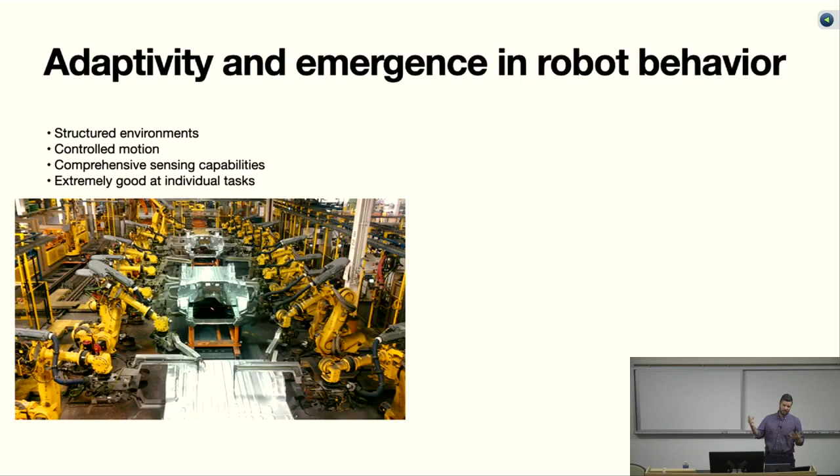I think if you ask people from the general public about what their thoughts about robotics are, we're often drawn to pictures of robots working in extremely structured environments, with very precisely controlled motion, in known settings with known perturbations, and they're extremely good at individual tasks. I actually don't have a background in robotics until my postdoc. I came up through thinking about living systems and working with collectives like ants and other organisms that have to deal with challenging locomotion tasks, move in complicated worlds, have very limited communication capabilities. This background really structures what I look for in working with robotics. I'm interested in things that can work in unstructured environments and display adaptive and robust capabilities.

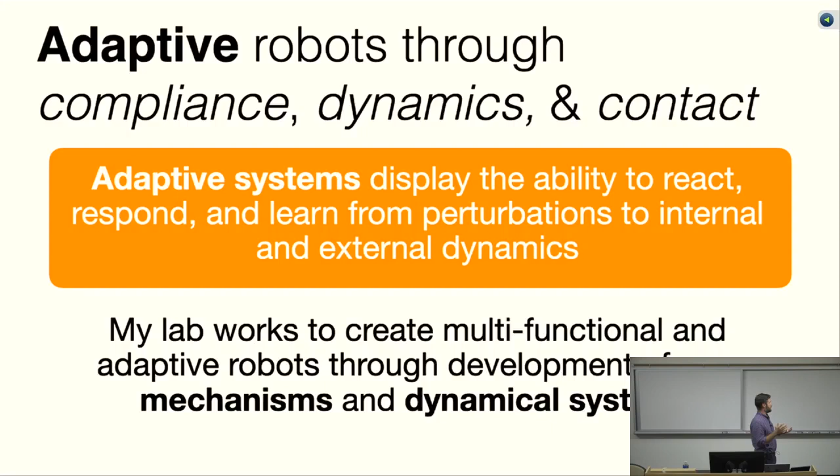In my talk today, I want to talk about three different aspects from the research topics in my lab, all focused around adaptivity. Adaptivity being the ability to learn, react, respond to perturbations, both internally and externally. We're going to talk about these in three different contexts: structural contexts like compliance, dynamic contexts like feedback loops that have emergent dynamics, and collectives that interact through contact. These are just a subset of the things that we work on in my lab.

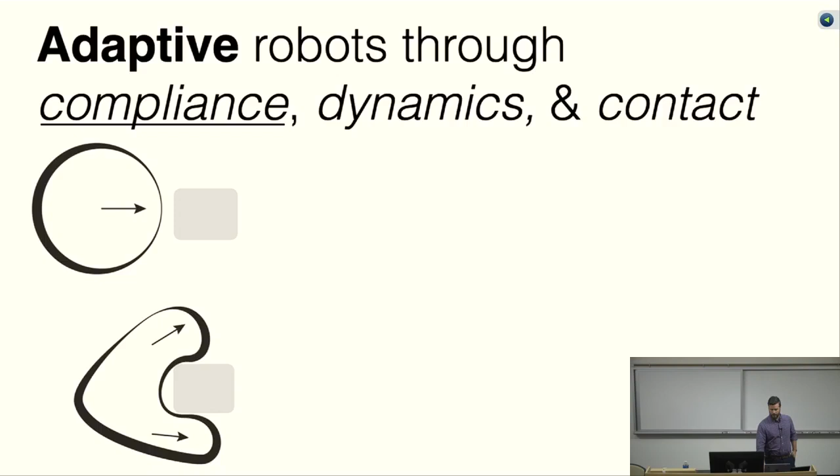Namely, like I just said, compliance is one of the themes of the things that we work on in my lab. Compliance has the inherent ability to adapt. Soft structures can change their shape in response to contact with objects in the world that maybe are unanticipated. We can use compliance to make robots adaptive with less control. There's a very emerging and interesting area of soft robotics that is exploiting compliance.

Similarly, I'm interested in dynamic systems from a dynamical systems perspective. These systems have adaptive capabilities all through underlying dynamics that don't necessarily come from programming in those behaviors, but come from the emergence of those behaviors from the connection of interconnecting sensory motor systems.

And I'm fundamentally really interested in systems that interact through contact. Collective behaviors where the robots or the animals are all in really close proximity, and the interactions are really mediated by mechanical interactions like bumping into each other, exploring how we can design systems that take advantage of those kinds of interactions.

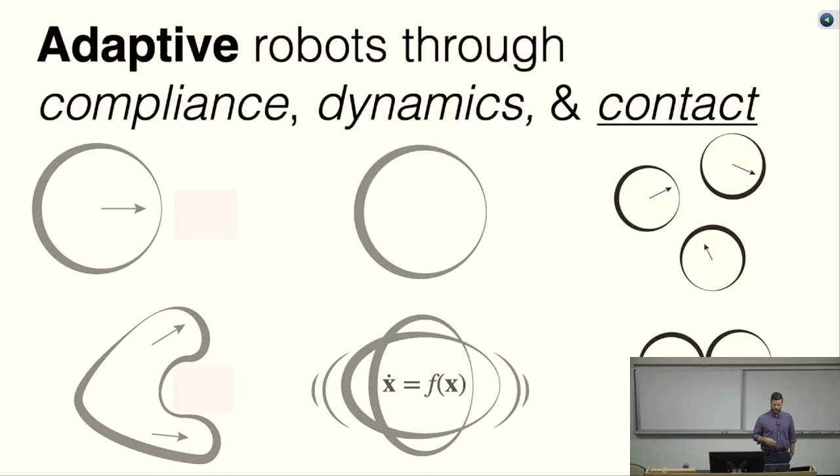The first topic that I want to talk about is using compliance in structures to make robots that can change their shape, that can modulate their behavior, and that can do this in adaptive ways. The first way that we thought about doing this was by using and exploiting material curvature to change the compliance of the body of a robot.

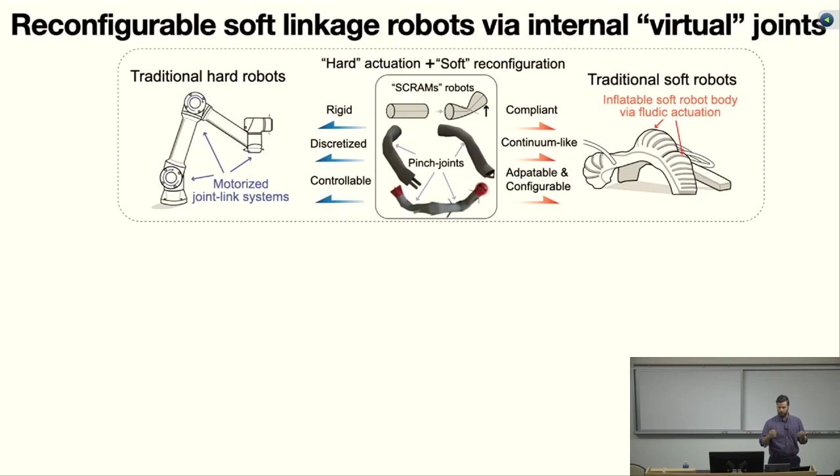By changing curvature, then we can change the local compliance that exists in a robot. You all probably have experience with how curvature controls compliance. A paper roll tube has high strength, but if I put a bend in it and make the cross-section flat, I now have something with very low bending resistance, and I can make a functional joint in a robot. We envision that by using tubular structures and changing their local curvature, we can make robots that can reconfigure the kinematics of their body, as well as reconfigure the compliant properties of their body for different types of tasks.

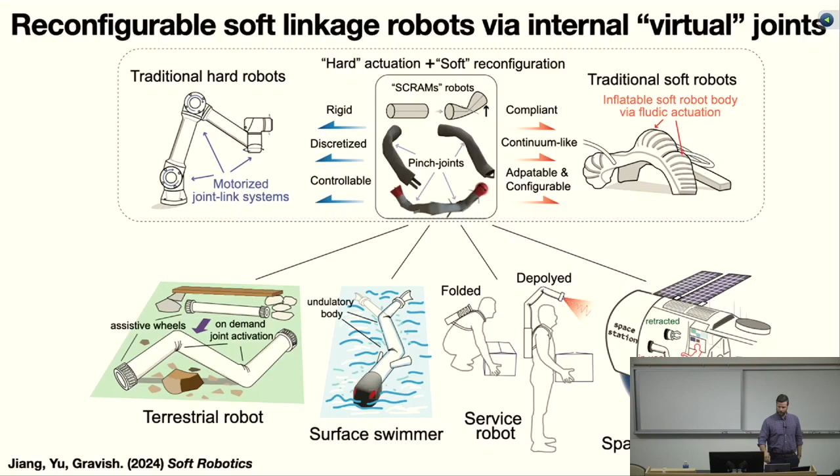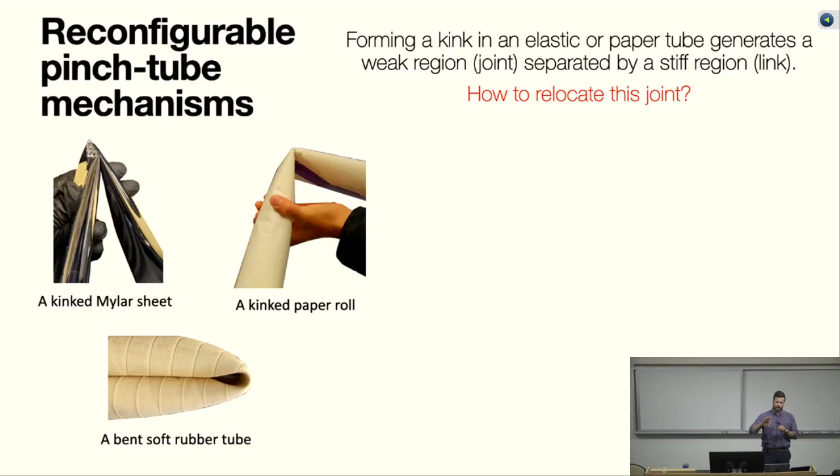So truly, the example of this is just pinching tubes. We worked on these reconfigurable pinch tube mechanisms, first exploring different ways a tube can create a functional joint, or create a structural element where the circular cross-section gives that part of the tube structure. The question we asked was, how can we reconfigure the bends that exist in these tubes so that we can reconfigure the types of joints we can create?

My student came up with a method where, if you take a flexible tube and pull a vacuum in it, it's going to buckle. But the problem is that buckle will happen anywhere there's low resistance to bending in the tube. So to control the location of that buckle, we put a cuff on the tube, slightly oval in shape, and by rearranging the arrangement of that oval, you can control exactly where you create these pinch points, controlling the location and orientation of a flexible joint.

Flexible joints are like the underlying structure to serial linkages and robotic linkages. By being able to change and reconfigure the locations of these joints, we could explore how to make different combinations of these pinch joints into different arrangements of serial linkages that could be completely reconfigured. The material they're formed from is soft inherently.

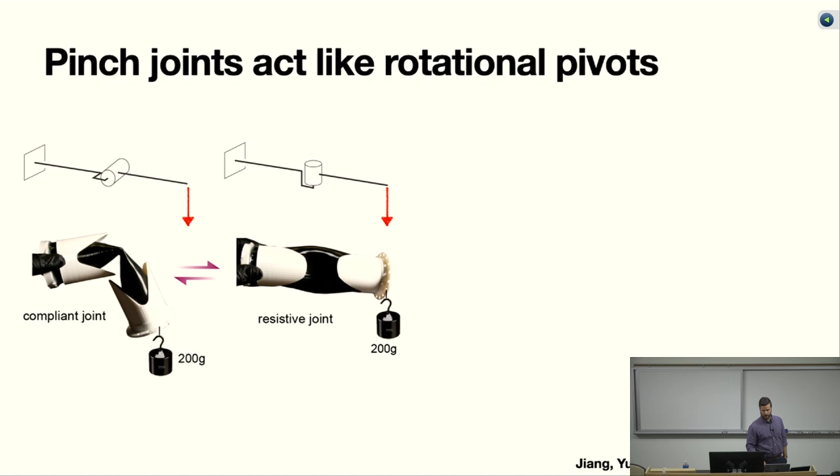It's a soft 3D printed TPU, to be exact. By pulling the vacuum, we create a very soft location, and by keeping a circular cross-section in other areas, we maintain structure. We used this to make what we thought were really interesting, simple reconfigurations of serial linkages for robot tails, used for little flapping and swimming robots.

We wanted to expand on this because right now, in this implementation, these joints are unactuated—they're being pushed on by a student. This is showing two different configurations: one where the two joints are configured on the same axis, and one where they're orthogonal.

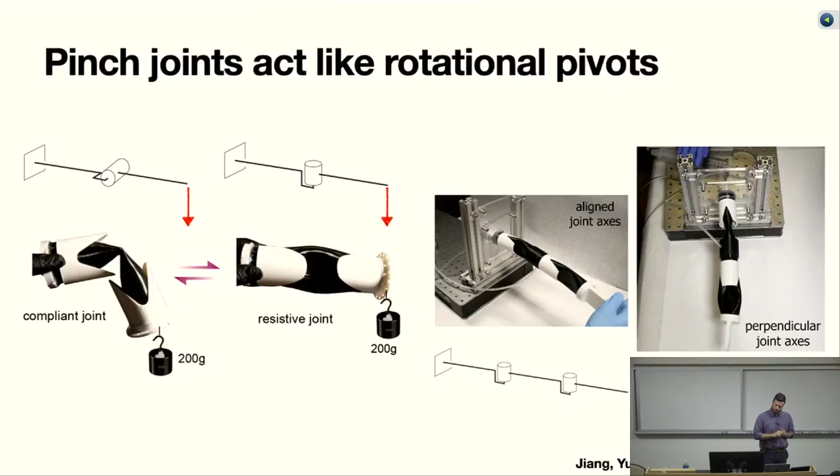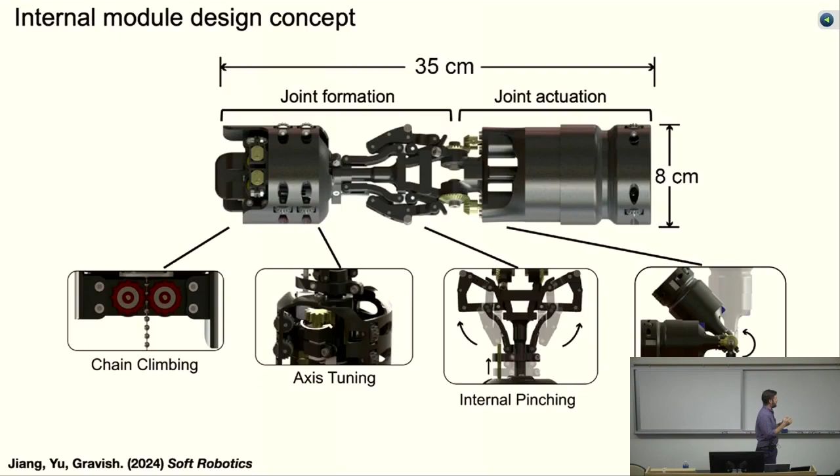But to actuate these systems required a whole re-envisioning of this problem. We designed internal modules that could move within an inflated tube—now not pulling a vacuum but inflating—and these modules were able to relocate within the tube, change the axis on which they'd form a joint, and then actuate that joint at that location.

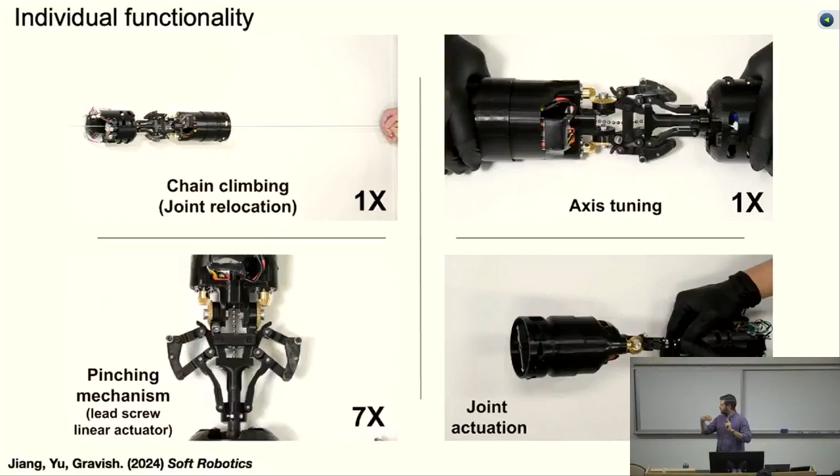So the idea is that I have an inflatable tube with modules inside that can move to any desired location. They can create a joint axis at any angle, and then actuate up to plus or minus 90 degrees at that location.

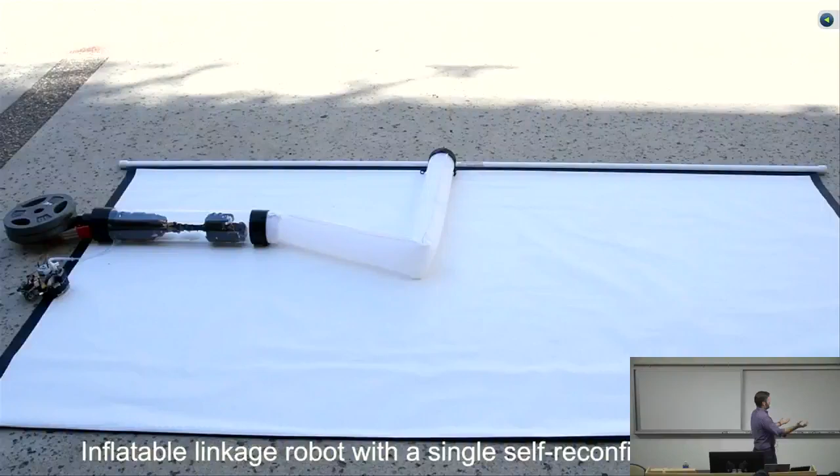The idea is that this all exploits the structural properties that tubes give us—that inflated or structural tubes, like the TPU one I showed before, have high cross-sectional area, high stiffness, and provide structure to a body. Whereas when I pinch that tube and put a bend in it, I create local regions that are relatively weak, which we can bend and use for actuation and reconfiguration of joints.

There's a ton of demos associated with this that I don't have time to show, but we made little walking robots that walk by rolling their limbs and paddling themselves across the ground. These are all untethered—they each have their own Wi-Fi module, their own battery, their own communication systems, and they can move, relocate, and reconfigure for specific locomotion tasks.

So that's just one example of using curvature, where we can change the local curvature of a structure to change the properties of the joint associated with it. This is all work that emerged from the EFRI project—somewhat older work, but it finally saw the light of day.

Another area where curvature, materials, and mechanics interact that I'm really excited about is the following. I'm sure everybody's used a tape measure before—if you haven't, you should, they're pretty fun. Tape measures have a really interesting structural property. If you've ever played with one, they are soft when you bend them, and they can create reconfigurable locations of a bent joint.

They're pretty strong, and if you push against the direction of curvature, you actually make a pretty strong beam. Tape measures can be rolled up into a very small, compact shape. I can put 25 feet of a spool of tape measure in a very small area.

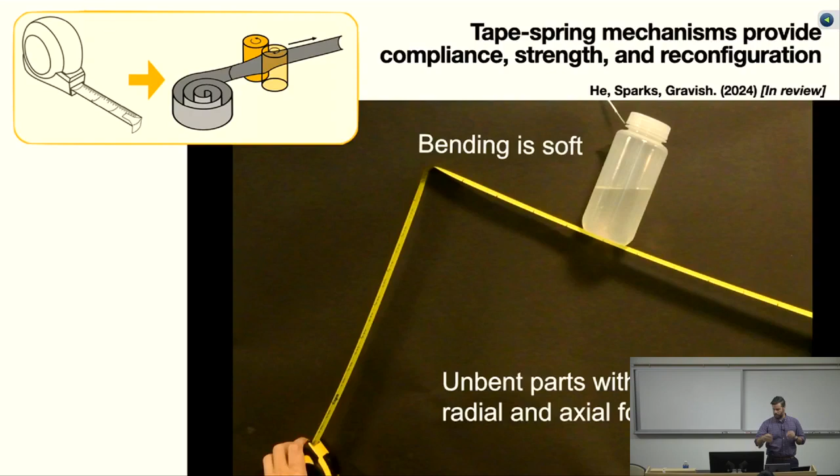So we wanted to see how we could also use curvature in the context of tape measures, where the curvature is what's providing the strength to the overall structure, to make manipulators.

And since I have 25 feet of spooled tape within there, I can do really interesting manipulation kinematics, all from the fact that the curvature of the cross-section when it's in its ovalized shape is quite strong. But at the flattened shape where we form this buckle bend, it's extremely low resistance. I can basically freely reconfigure that location.

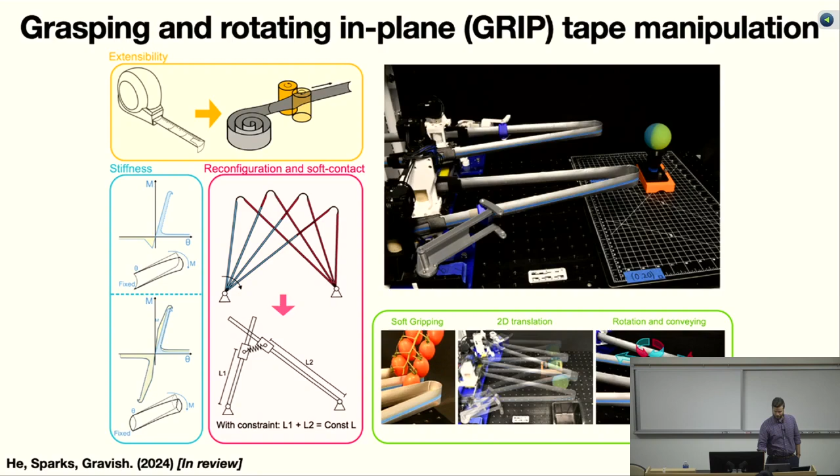This is a first version of this, and you'll see it's truly a tape measure. What's really cool is that we can do these interesting kinematic manipulations where, for instance, by unspooling tape on one side and spooling tape in on the other side, we can keep an object in place and rotate it. And again, we can do this over large rotations because we've got a ton of tape that is spooled up.

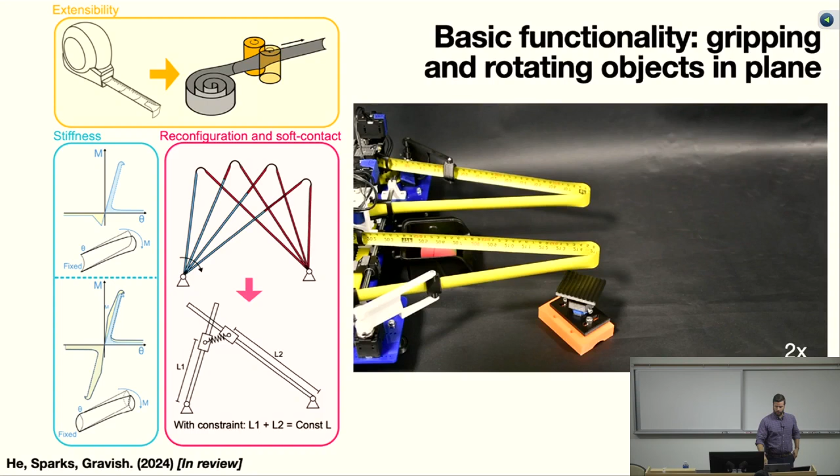We can convey objects, either individual objects or multiple objects. Again, this is using these super lightweight structures where the strength is all coming from the intrinsic curvature of the material.

It's inherently a soft device. If I slam it into something, it just buckles and bends out of the way. It adapts its shape to local perturbations - I want to say that in a sort of overly academic way. But we can smash this thing into stuff, into walls, and it doesn't break because the underlying material is relatively soft.

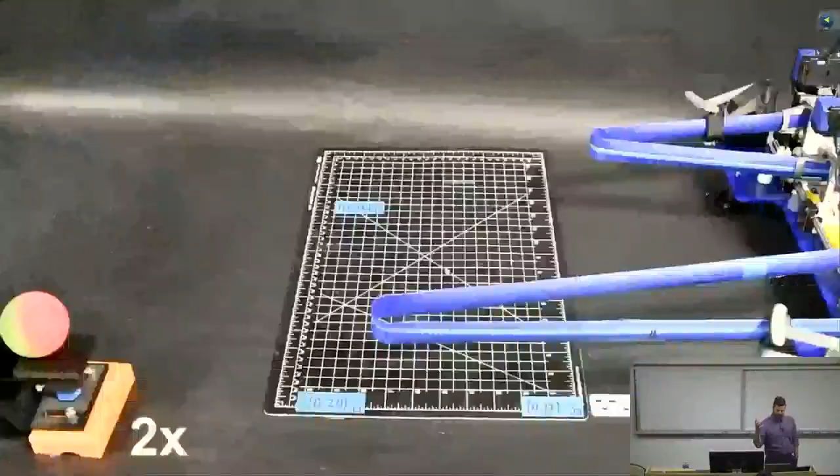So it has all these properties of what we think of in soft robotics as being advantageous. It will not hurt somebody when you're interacting with it. It is inherently soft, so it's very hard to break, but it has enough strength to perform the kind of tasks we're interested in. We can store up a lot of spooled tape to extend these things out to long distances, and we can do very fine-scale manipulation with it.

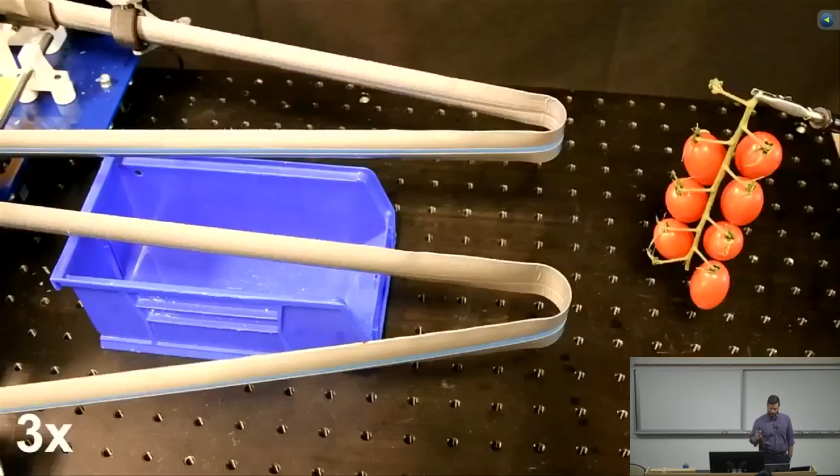This is all teleoperated, by the way. The graduate student working on this is driving these around. So this is an example of picking tomatoes.

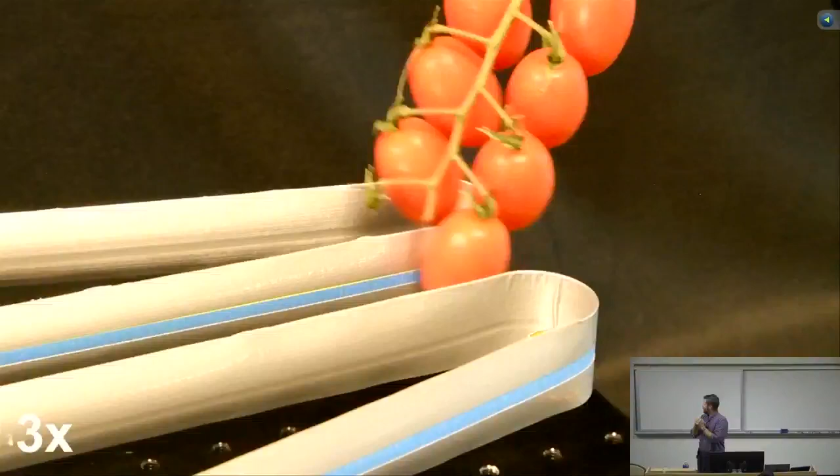By watching the curvature of the bent end, you can estimate what the contact forces are. We've since put force sensors on this so that we can actually do force feedback.

These are just examples of this twisting motion, which I think is really unique to this structure. And again, if you put enough tape in there, you can twist for many, many rotations.

You have to have a light bulb turning on in some of these demos, right? Everybody has a soft robot hand that turns on a light bulb, so we had to do that.

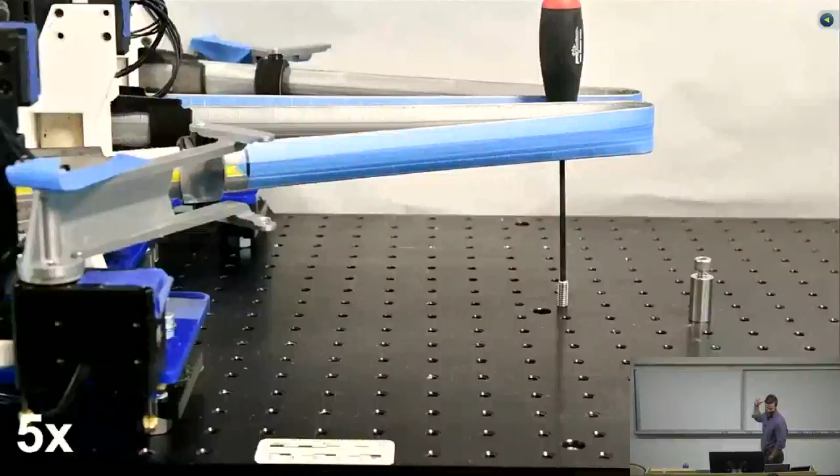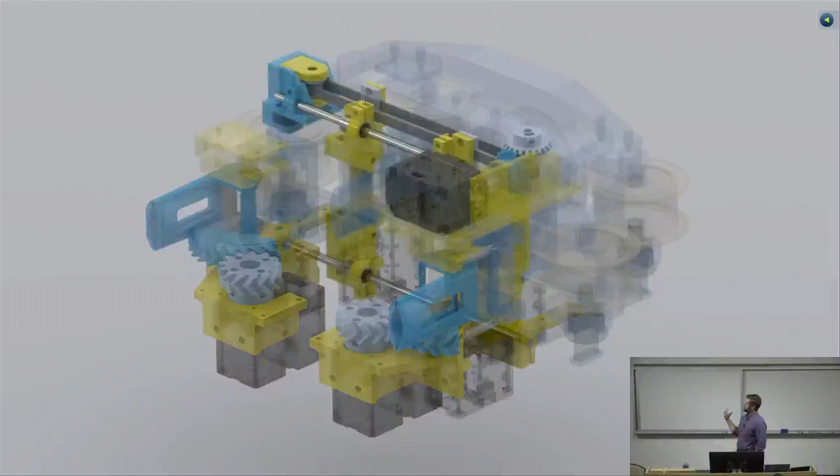Reviewers, maybe some of you were out there, complain that this is just planar and so not that interesting. So in an effort to address that, we've built a smaller version of this that has multiple extruders, so it has the same kind of kinematic capabilities as the previous one. But now we can put this on a robot arm, and by doing that, we can interact with more interesting types of objects.

So this is a jalapeno plant. You go to Home Depot and you want to buy a plant that has fruit on it at that time so you can do your demos. Nobody sells cherry tomato plants that have fruit on the vine - you've got to grow that from scratch, but jalapeno plants are very easy to buy, so here's a jalapeno plant.

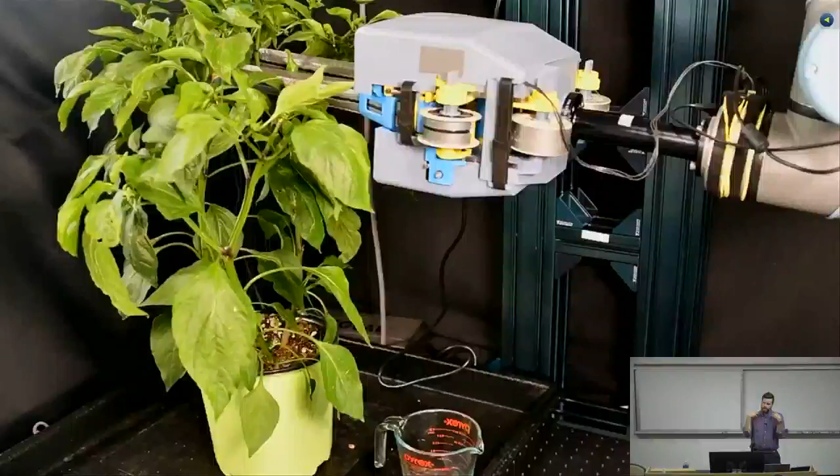But this just demonstrates that we can now make this small enough so that we can still achieve the same kind of manipulation capabilities, but we can do it in a 3D context. And I think this has a really nice advantage over some other manipulation methods because the tapes are extremely compact, but they can extend out to very long lengths.

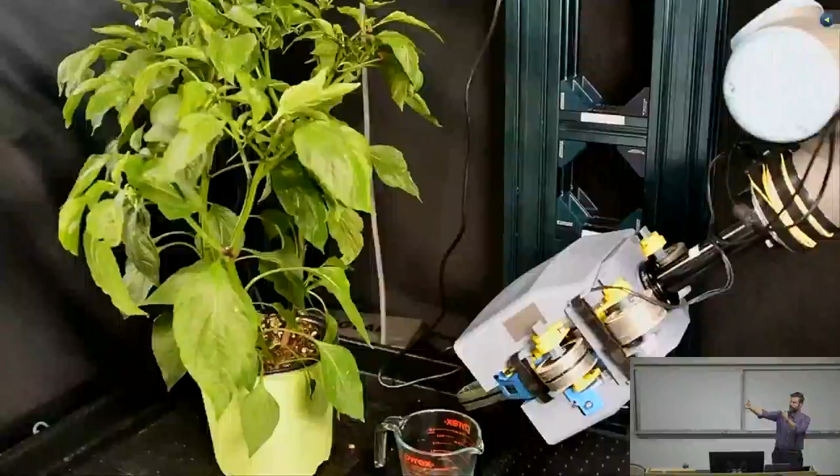I should say for this, we don't have 25 feet of tape - we've got something more like 5 feet of tape, which means about 2.5 feet of extension since it's a triangular shape.

These tapes can reach into cluttered environments. They have a kind of soft contact. When you pinch things, you're pinching them through the bend of this tape, and that bend acts basically like a soft spring.

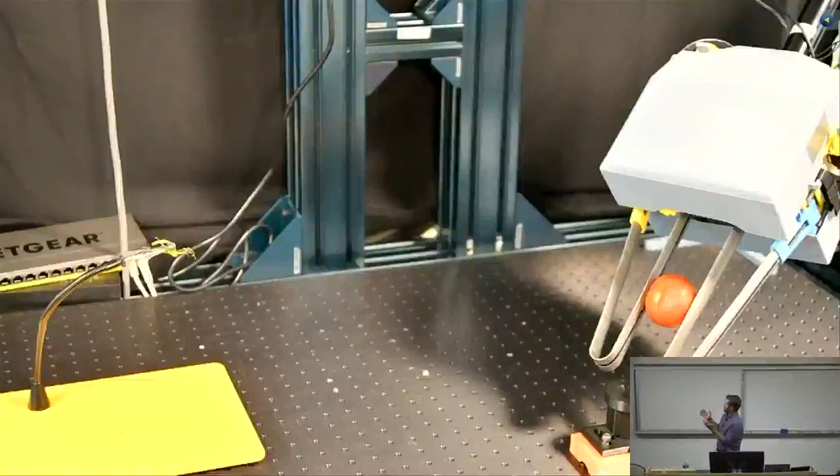And so we can do really interesting manipulation capabilities with this, all inherently derived from what I think are the amazing properties of these tape springs. Tape springs have been used a lot in space applications for deployable structures and for structural elements of lightweight trusses. But we haven't seen them used in this kind of application where they're used as the actual structural member of the manipulator, but also the contact surface that the manipulator uses to interact with objects.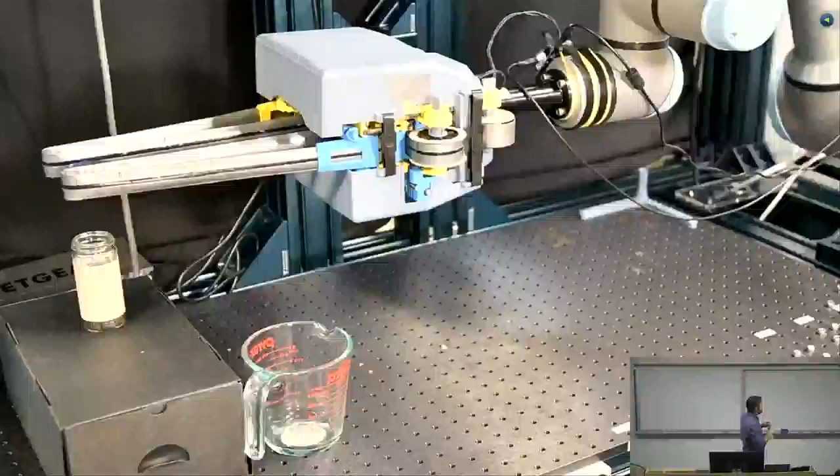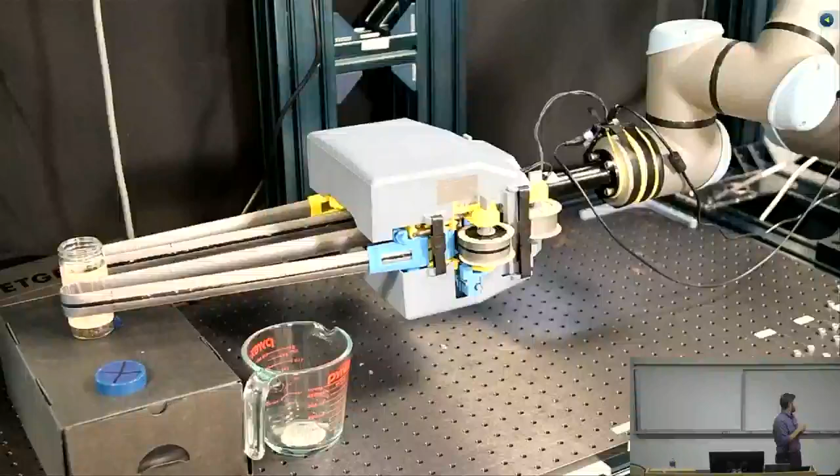The kinematics of this system are fairly easy to write down mathematically. You basically just have a triangular shape. The only uncertainty is what the radius of curvature of the bend is. When it's unloaded, the radius of curvature that bend makes is exactly the radius of curvature of the tape itself. That's not something that we've shown — people who've studied these structures have shown this before. So you basically have a problem where you've got a sort of quasi-triangle, and you're just trying to locate the vertices of the quasi-triangle by changing the rate of change of the length on the left and right side of the triangle.

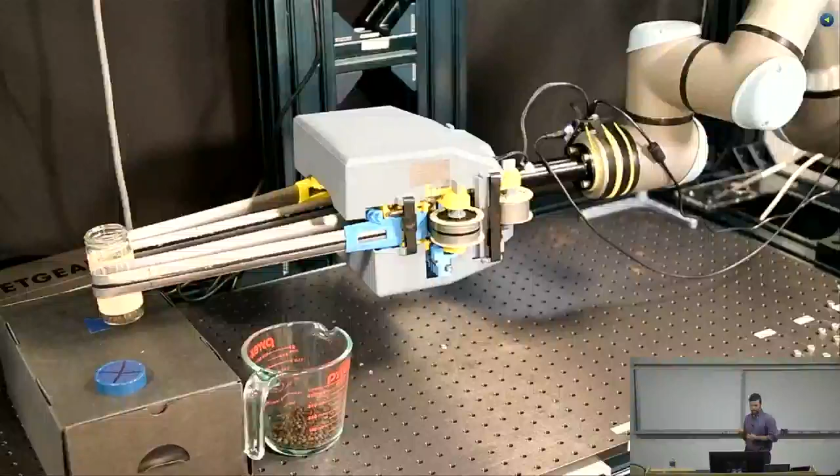There are 4 inputs for the length of the tape, and then there's a width control of the middle jaws as well. And in this, it's sitting on a robot arm, so it has all the 6 degree of freedom capabilities beyond that.

Underwater. Okay, we'll move on from this.

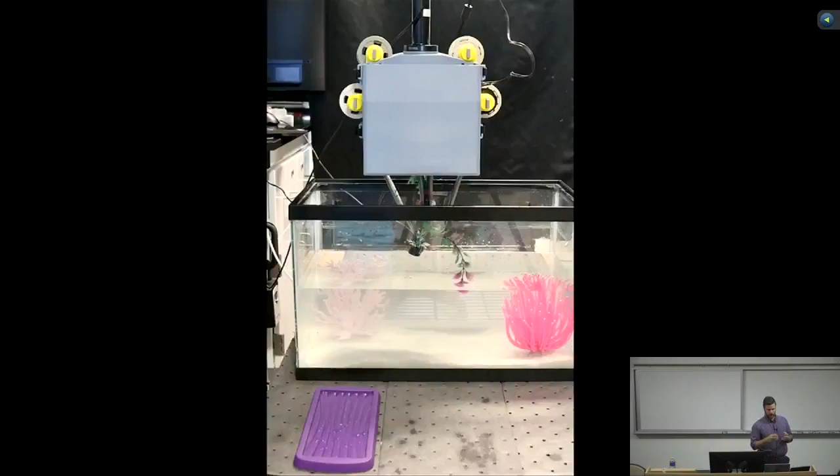This has been a really fun project, and this is just, I think, a little appetizer for how curvature can be used in robotics to change the structural properties of a robot manipulator. In the first example, that was by using the change in material or mechanical properties that happen when you create a pinch in a tube. In the second case, it's what happens when you create a flat bend in an ovalized structure. In both cases, we're modulating, or rather using the modulation of the stiffness that happens by changing the cross-sectional curvature to create what we think are interesting and useful either locomotors or manipulators.

This is also, I think, a plea for looking around and finding creative inspiration by what's around you. We literally were just playing with tape measures and we thought, what can we do with this? We extended it out and started pushing things around on the table. And we thought, wow, this is maybe an interesting application of using these extendable tapes as manipulating type structures. And that led to a very interesting whole platform of research.

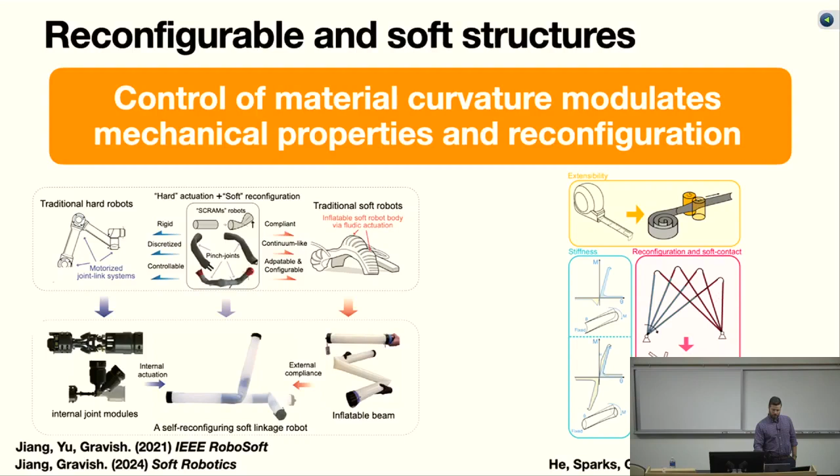I'm going to make a hard transition, apologies all, to the second area that I'm interested in. I told you I'm transitioning from tape measures to bees now. I told you I come from a world of looking at insects as inspiration for robotics.

So this is an area of research that is associated with dynamical systems and the inherent adaptive capabilities of dynamical systems that we want to use to build robots that can adapt to their environments or adapt to changing properties of their own body. This work comes from a long collaboration that I've had with a group at Georgia Tech who are true insect flight biologists and study the physiology of muscles and things like that. But it's inherently a collaborative process of trying to understand the underlying mechanics of how insects generate their flapping wings. I'll show you robots at the end of this that use all these principles.

If you've never thought about the way an insect flies, that's great — I think you should, it's really interesting. Insects generate their flapping wing beats through pairs of muscles in their body: a muscle that causes the wing to go in the downstroke, and a muscle that causes the wing to move in the upstroke. These muscles are pulling against their elastic body. They've got an insect skeleton that has elastic material in it. The elastic material resilin was discovered in the insect's exoskeleton, and resilin is the most resilient material that has been found in biology. It restores something like 99% of the elastic energy under stretching.

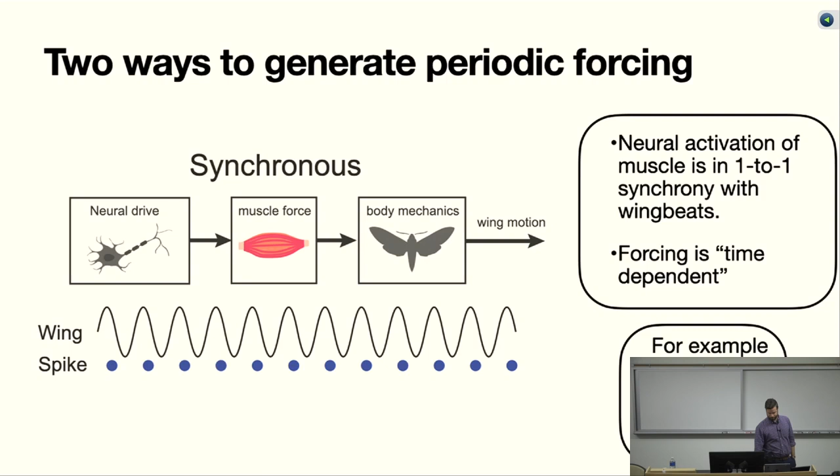But insects with faster wing beats, like mosquitoes, bees, and flies, have wing beats in the hundreds of hertz. They've evolved a different way to generate wing beats—what's called asynchronous actuation in the biological literature.

If you look at this oscillating signal corresponding to the wing beats, the muscle is only activated from the brain once every tens of wing beats. So for many wing beats, the brain is completely out of the loop—it's a delayed stretch activation reflex in the muscle itself that causes it to oscillate.

This means the brain isn't telling the wings to flap at a certain frequency—the frequency is completely emergent, dictated by the elasticity of the body, the aerodynamic forces, all that kind of stuff. What's really cool is it provides adaptive capabilities to insects, which I'll show you later, such that just like a harmonic oscillator changes its frequency if you change the mass it's oscillating, the same thing happens with these insects.

This asynchronous actuation produces what are called limit cycles. From a nonlinear dynamics context, they're oscillations not driven by any periodic forcing—they're driven by a specific feedback process within the body.

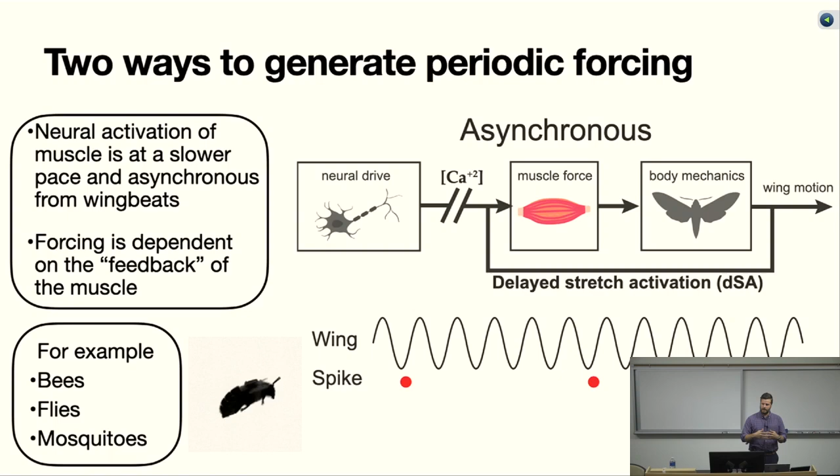Delayed stretch activation is interesting in that if I take a muscle and pull on it, after a short amount of time it generates a force that wants to contract back—that's where the delay in the term comes from. Stretch activation means I have to pull on it and stretch it before it will generate a force to contract back.

We're all familiar with a dash pot—if I pull on it with a specific velocity, it pulls against me with a force proportional to that velocity. Delayed stretch activation is like taking a dash pot and delaying its response: I pull on it, and a short time later it pulls back against me with a force proportional to the velocity I pulled with.

When we induce delays in systems, that induces instabilities, which induce oscillations, and that's exactly what's going on here. You've got a process where the muscles are pulling against each other, exciting each other through this limit cycle type process, and creating the oscillations.

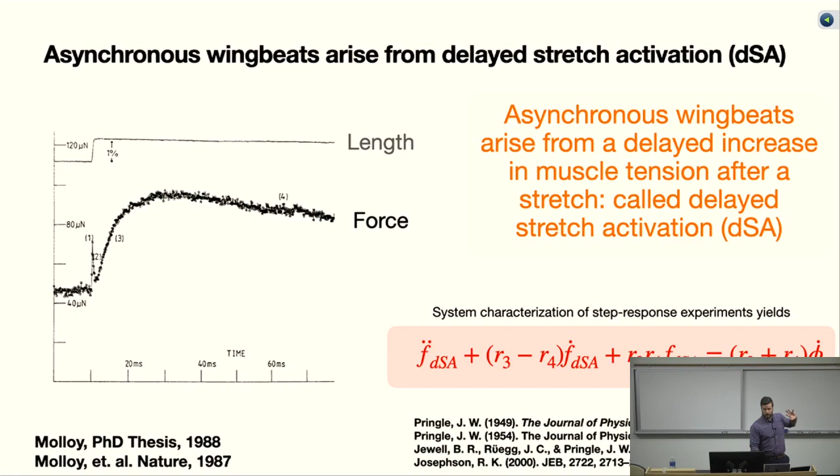We dug into the literature and came up with a system model of delayed stretch activation. We then coupled this model of insect muscle to the model of the thorax we had previously developed, which came from measurements on hawk moths and bumblebees. We found that when you couple the delayed stretch activation process of the flight muscle to the spring mass dynamics of the body, you get exactly what you might expect: a process where in some parameter space regimes, oscillations grow in the system, and the system is unstable and wants to flap.

This is a spectrum of the stable and unstable modes of the system. If I increase the rate of this delayed stretch activation on the x-axis, meaning a faster response in the muscle, it becomes stable and I won't have wing beats.

But if the muscle is too slow, that's actually a good thing. If the muscle is slow in its response and I pull on it and it takes a while to contract back, then it will excite oscillations. Oscillations in this context mean an instability of the stationary mode where the wings don't flap. Instability is often thought of as not good, but in this case, instability is good. We want to excite instabilities in the system so we get flapping.

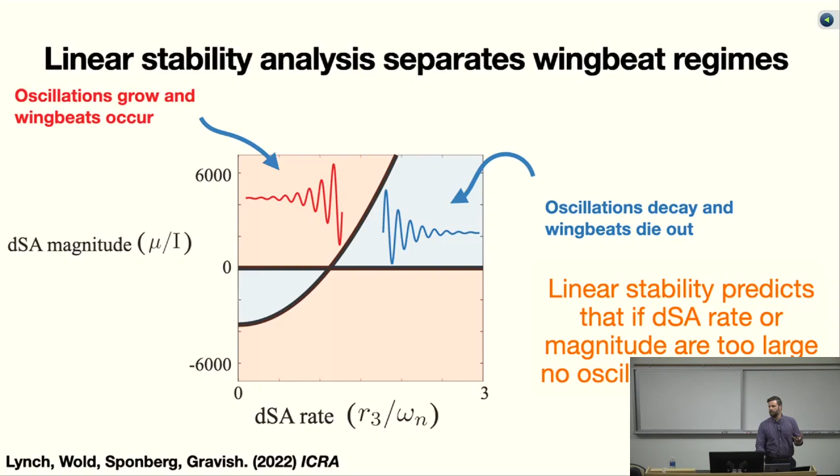What's really cool is when you build systems with these properties - the spring mass dynamics of the body, the stretch activation properties of the actuator - and put them together, you get very adaptive flapping that can respond instantaneously to perturbations to the body or through the external environment: collisions, changes in aerodynamics, things like that.

We built a big dynamically scaled system to study the fluid mechanics of this process - or rather, to emulate the fluid mechanics that insect wings experience - and that also embody the springiness of the exoskeleton by building these torsional springs.

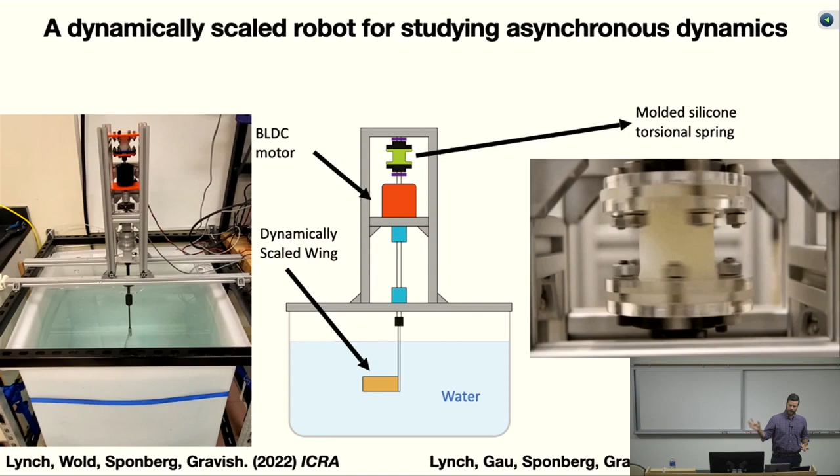We actuate the system through torque control so we can exactly prescribe delayed stretch activated dynamics. To give an example of instability here: if we set up the system where the y-axis is the magnitude of the stretch activation response, and the x-axis is the speed of the stretch activation response.

If we make the magnitude of the stretch activation response relatively low, then when I ping the system, shown in this plot, it oscillates a little bit, but those oscillations decay away. If I increase the magnitude of the delayed stretch activated response - meaning the force that pulls back under a stretch - I see that when I ping the system, I get slightly larger oscillations.

But if I move into this unstable regime, I see emergent oscillations, and the system will oscillate with a relatively high wing beat and frequency that is completely dictated by the mechanics of the system - the inertia of the wings, the aerodynamics of the wings, the spring stiffness, and the properties of the muscle.

So our whole takeaway so far is that many insects you see flying around aren't controlling their wing beats on a beat-by-beat cycle. They're generating wing beats through an emergent process that's just happening within the muscle.

You can take out the brain from the system. You can take the muscle out of the body - these are amazing experiments done in the 60s - hook it up to a mechanical spring, and the system will oscillate spontaneously. So this muscle wants to spontaneously oscillate.

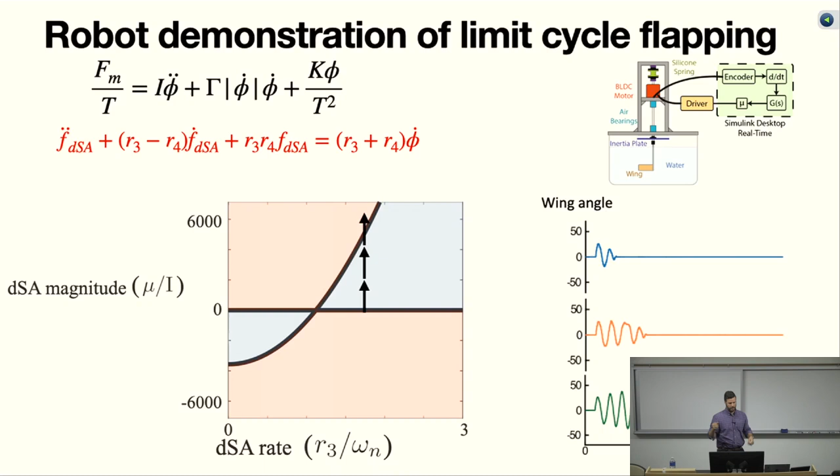And we want to use that to generate adaptive responses in these flapping wing systems. So what does an adaptive response mean? Well, one example is imagine I have a wing flapping and all of a sudden I instantaneously change the inertia of the wing.

We set this experiment up in our system: at a time t star, we drop a plate onto the wing. That changes the inertia, and what you see is there's a near instantaneous response of the system to adapt to a lower frequency and a higher amplitude in this case.

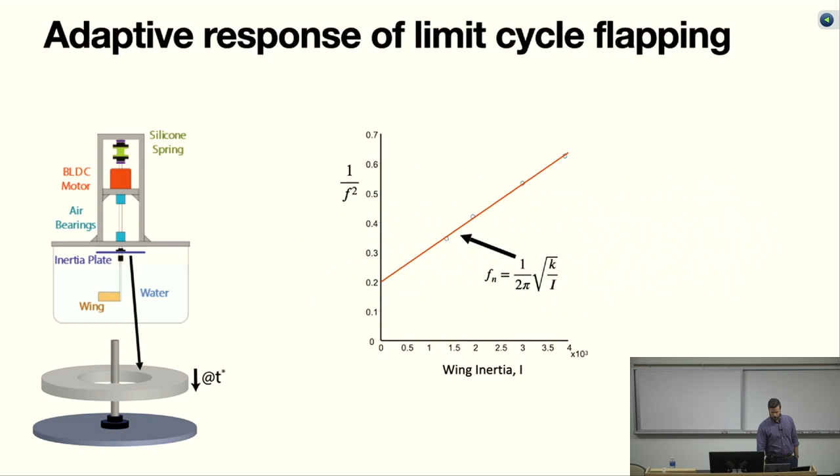We did this for a number of different changes of inertia to the system, and also by changing the size and shape of the wing. What we saw is a result that pretty much exactly matched the results that people in the insect flight literature have shown.

On the y-axis here is 1 over the emergent frequency squared of the system, and on the x-axis is the wing inertia. Inertia and frequency are related by the square root of 1 over inertia, so a straight line just reflects the resonant dynamics - it means the system changes to a new frequency which is exactly the new resonant frequency of the system.

It's exactly like I have a spring mass system that's oscillating, and I do the experiment where I drop a mass on it. All of a sudden, it's going to change its resonant frequency.

I think that's really cool because there's no sensors involved here, right? It's not like the robot, or the insects, are using some sensory processes going through the brain that say, I've now experienced a dramatic change in my wing area because I hit something and broke my wing. Instead, it's the underlying actuator's properties and the proprioceptive capabilities of that actuator that provide these instantaneous responses.

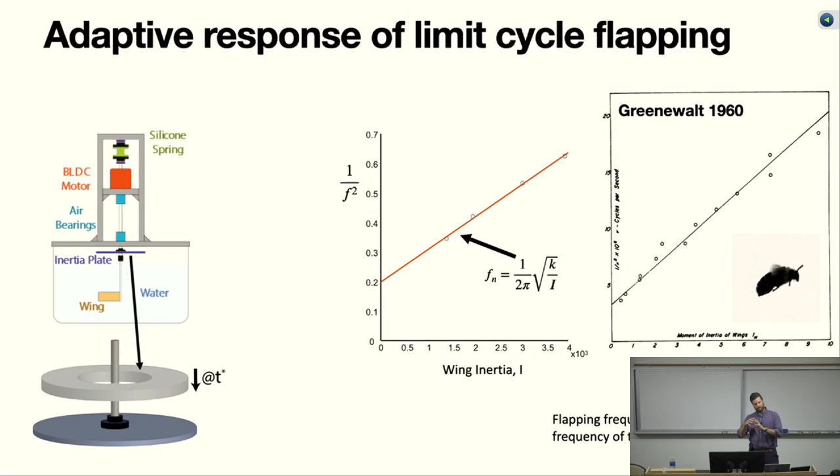There's so much literature on insect flight frequency where people take insect wings, clip them, and measure the emergent frequency of flapping. This shows the same plot we're showing for our case here: delayed stretch activation produces these emergent properties where the brain and sensory systems aren't involved in dictating what the emergent frequency is. It's just the inherent properties of the muscle and the body.

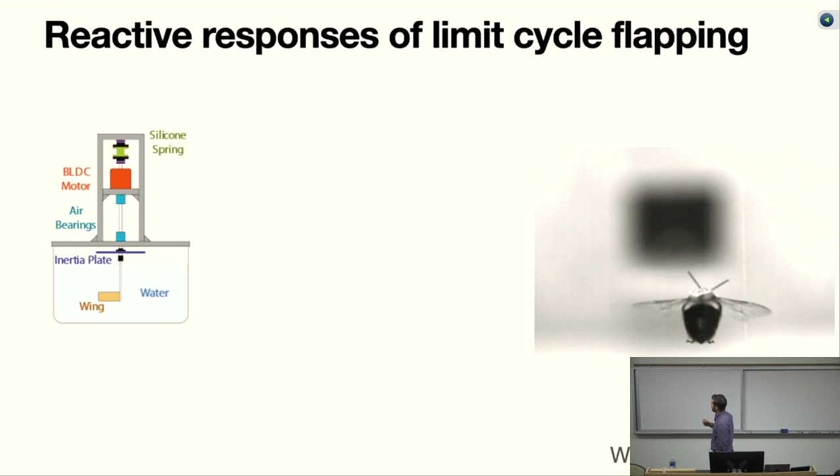Another cool behavior we observed during my postdoc, working with insect flight biologists, doing things like this. You can't see it, but there's a tripwire here, a thin fishing line, and this bee flying back to its nest runs into it. What do we see? It's flapping its wings at like 180 hertz. It hits right here. Within about 2 to 3 wing beats, the wing beat is completely stopped, and then it starts again. That time scale is faster than most sensory motor time scales.

What's happening here is that the wing beat is stopping because a muscle needs a stretch to be actuated. If I stop it from stretching, there's no more actuation. So if I have a muscle being stretched and creating an activation force based on its prior stretch, as soon as I halt that stretch, I halt the actuation. So you have a system where responses to collisions happen very quickly, but not through sensory processes—they happen through the limit cycle dynamics of the system and its inherent adapted properties.

We set up, again, a very simple experiment: stop our wing, see what happens. Wing collides with an object. It stops immediately. You ping the wing again, and it starts up again.

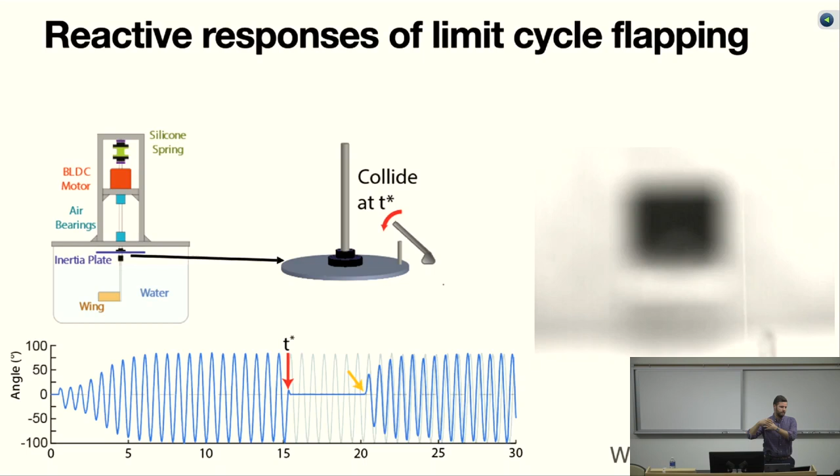This is all fine and good. We've been doing this in these big water tank experiments, and I think I've demonstrated most of what we think are really cool adaptive properties that people have demonstrated in insect flight within our robot. But we actually wanted to make a robot that could fly using these principles, and show that if we run this robot into a wall, it will stop flapping because of the delayed stretch activation process. It will start flapping again when it gets a kick, et cetera.

Very recently, all kind of unpublished and really cool stuff we've been working on are small DC motor driven robots that use delayed stretch activation to flap their wings.

We use DC motors because they're easier to work with than small piezoelectric motors. We also use DC motors because they have an inherent proprioceptive capability—when they rotate, they create back EMF, which is proportional to velocity if you've ever worked with motors. So a motor is inherently a sensor as well as an actuator. We can actuate the motor and at the same time sense what the velocity is, and the velocity, the stretch if you will, is what creates the actuation.

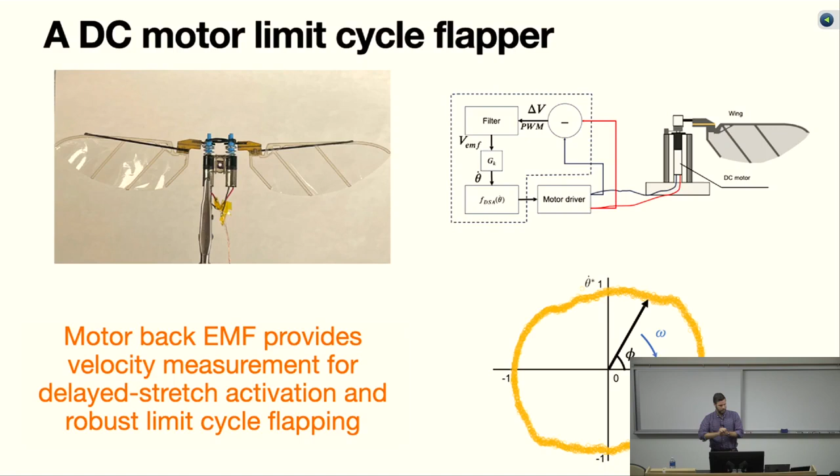But working with this system highlighted a really interesting challenge that we came across, one that biology has solved in a really interesting way. The conundrum occurs because delayed stretch activation is paired up among muscles on the left and right side of the body. So insects, and our motors, are individually driving the left and right side of the wings through this kind of limit cycle process. The problem then becomes, how do I make the wings synchronize?

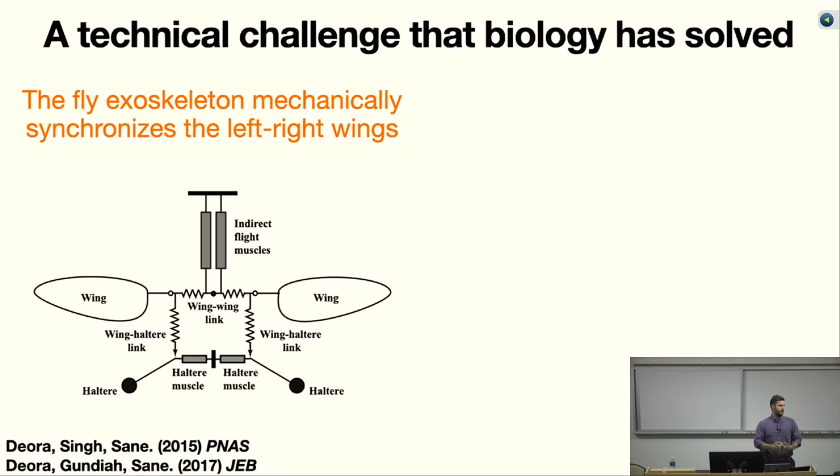Because the brain is not involved in generating the wing beats, it's just through a stretch activation process. Insects evolved a physical structure in their body that couples the left and right sides of the wings. Biologists have shown that if you disconnect the left-right sides of the thorax, the wings go out of phase because they don't know about each other—they're not communicating through any brain-based neural signal. They just respond mechanically to the local stretch. So there's a literal physical structure that synchronizes the wings.

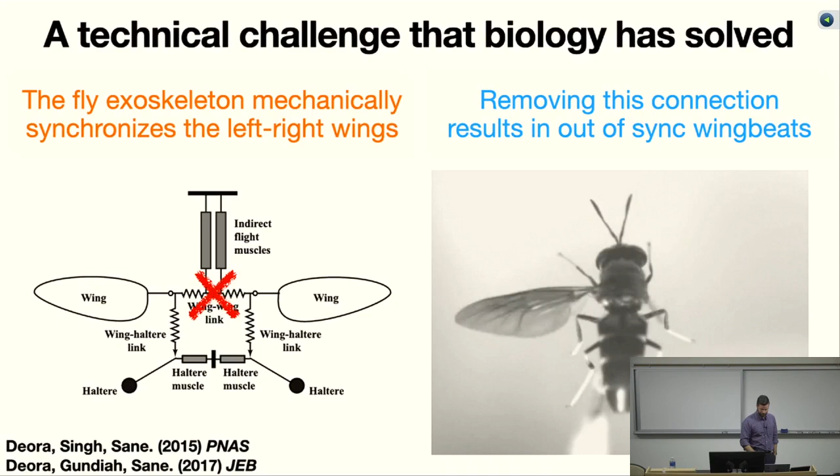We came across the same problem: if you drive two DSA motors, they'll just move at whatever phase and frequency they're acting at, because they only respond to their local movement, generating limit cycle oscillations based on their individual motions. Inspired by how insects do it, we came up with a simple physical structure that coupled them, using elastic tendons. Just the presence of these two elastic strings, which stretch if the wings go out of phase, causes very robust coupling among the wings.

What's really cool is that with elastic structures—I don't have time to show you unfortunately—if you make one wing collide with an object, the other wing is unimpeded but stays synchronized. It's a very robust way to synchronize these things without any electrical communication between the wings, just as insects don't need nervous system communication between muscles. It maintains synchrony even if you change the cross-sectional area of one wing, driving one system to a slightly different frequency. Because of the nice properties of synchronization, you still get tightly coupled flapping that persists across many kinds of perturbations.

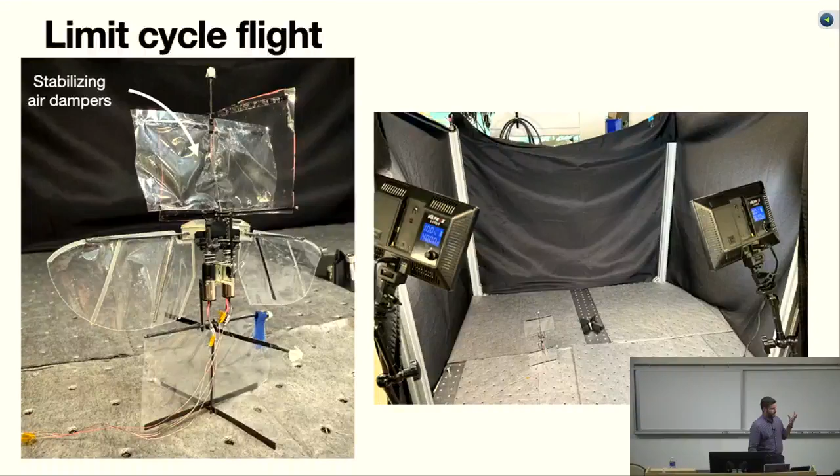Lastly, we wanted to demonstrate flight with this. This is the robot in a little flight arena, demonstrating takeoff flight—not any controlled motion. We're using stabilizing air dampers to stabilize it. The wing beats here are about 25 hertz, much lower than bees, but this is all driven through this self-excited feedback process. Mechanical structures are synchronizing the motion of the wings, and it's capable of flying, hopefully soon to be controlled.

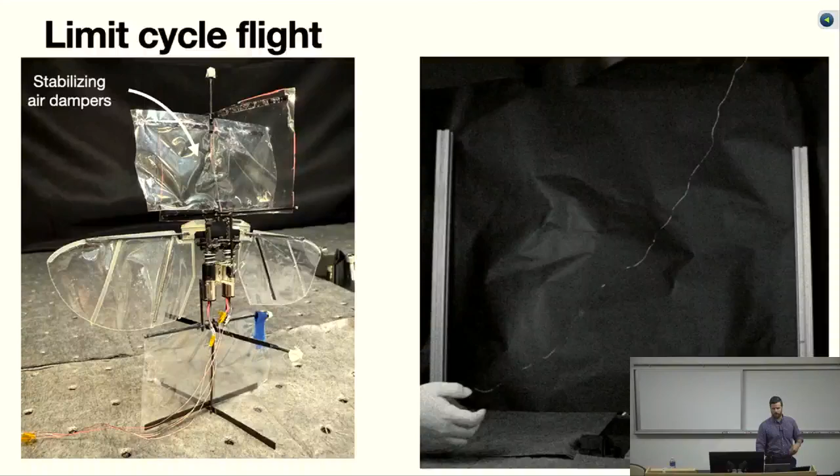This limit cycle process of actuating these robots highlights what I think are really cool adaptive and responsive behaviors we see in insect flight. We've attributed and demonstrated that the delayed stretch activation process in insect flight muscle is responsible for a lot of these robust adaptive behaviors—adapting frequency to match the resonance of the system, responding quickly to perturbations like collisions—all without sensory motor or higher-level control processes. It happens through the actuation properties of the muscle itself in biology, and in our emulation of that property in our motors.

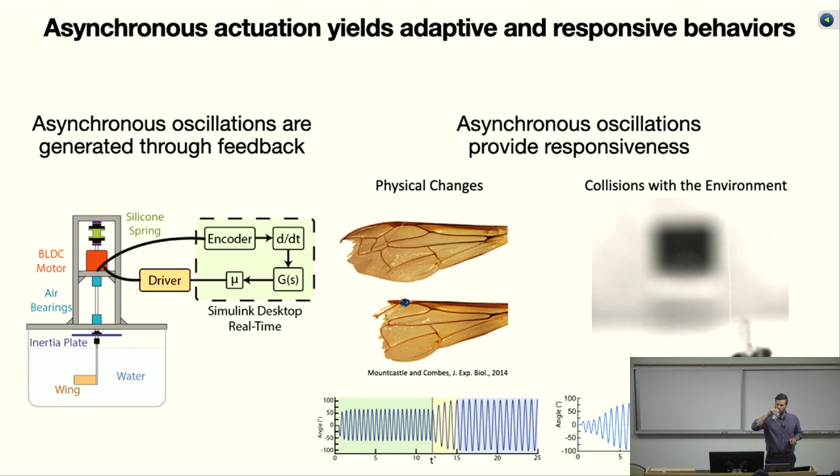This has been a long-term collaboration with insect flight physiologists, including Simon Sponberg at Georgia Tech, and it's been a really fun collaboration. I think it hopefully highlights my interest in nonlinear dynamics and the ability of nonlinear dynamical systems to generate very robust emergent and adaptive behavior.

The last topic in my potpourri is synchronization, but in a different context. I'm very interested in systems that interact through contact—swarms of robots in close proximity that push against each other and do interesting things. About 4 years ago I read a really interesting paper, not by me, I have no affiliation with the authors, but it fascinated me.

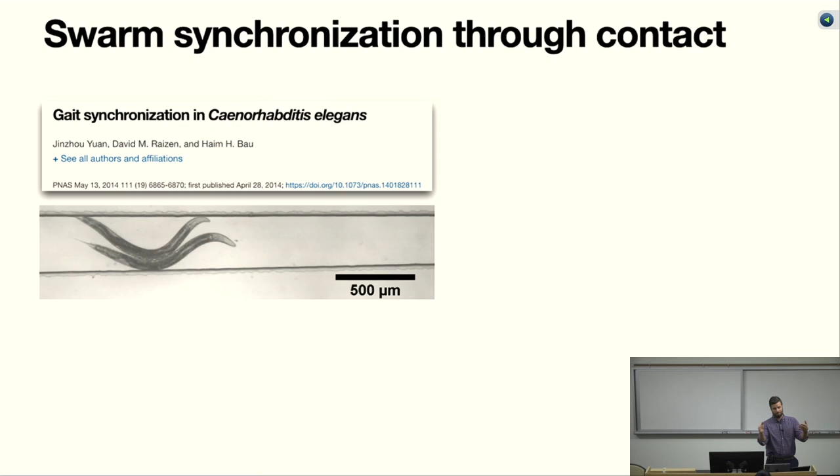If you take two worms, C. elegans, a commonly studied worm, and put them in close proximity in a pipette, they will synchronize their gait. They have a swimming gait, and when in close proximity, they synchronize. The authors were able to turn off all touch sensing in the worms—we have huge genetic capabilities with C. elegans, so you can basically make them not know they're touching anything—and they still synchronize their gait.

And the authors basically claimed that steric hindrance is the dominant factor responsible for motion synchronization. Steric hindrance is an annoyingly academic term for contact, my body can't move through yours, we make contact with each other.

I also knew that the way C. elegans generate their oscillation is what's called a reflex chain. They've got stretch receptors in their body, so if I bend my body up top, a stretch receptor down the length of my body senses that stretch and responds by actuating, which causes a chain reaction effect that propagates a bend down the body. People have done cool experiments where if you pinch a C. elegans right here, it'll oscillate up here, but the oscillations stop down here because you stop the stretch of the body. This led me to limit cycles, a chain reaction of oscillation, and contact interactions happening between systems that lead to synchronization.

My hypothesis was that these systems, which generate oscillations through limit cycle type actuation like I just showed you with the flapping wings, but also interact through contact, may be able to coordinate their behaviors without any communication among the group, just through the physics of contact and the physics of limit cycles.

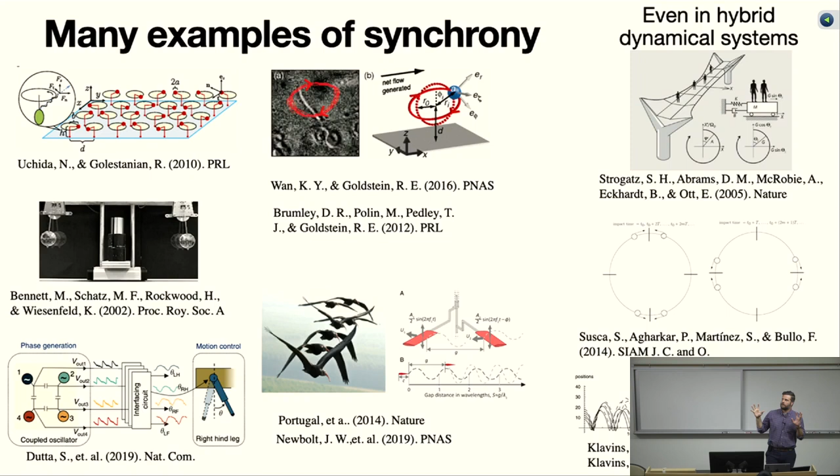There's a huge literature on synchrony. If you haven't heard of the Millennium Bridge problem - people walking across the Millennium Bridge excited instabilities and made it shake a lot. I think that work was done here by Ed Ott, if I recall. There's wonderful, beautiful nonlinear dynamics of synchrony, but there's not a whole lot of discussion of contacting systems in synchrony.

So I want to give you a simple overview of the way we thought about this problem and what we were able to do with it.

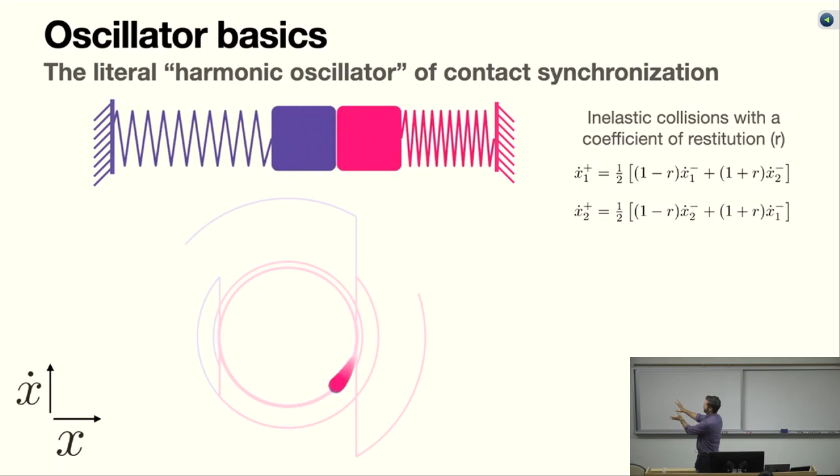If I put them in contact with each other though, with just a little coefficient of restitution, meaning they lose a little energy, what happens is that just through contact, their phases get closer together and they synchronize. This is a simple thought experiment demonstrating that maybe we're on the right track - that the worms are synchronizing because they're excited through a kind of limit cycle, and maybe we can adapt this for robots to coordinate their behavior.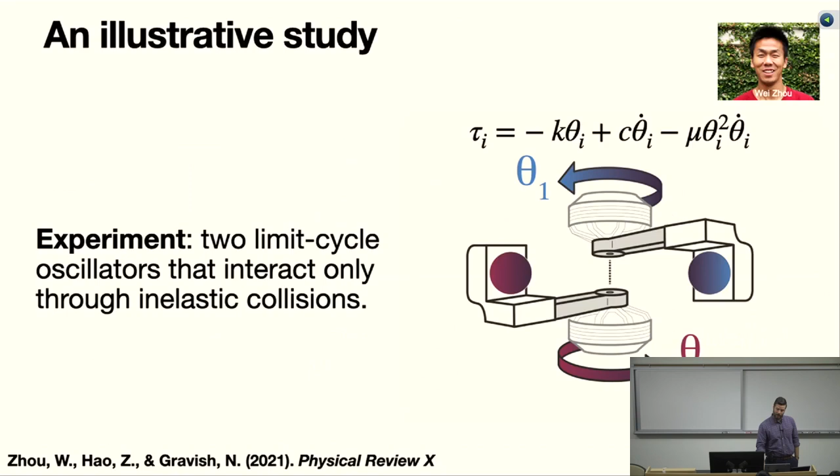We went through a whole process of analyzing this system. We understand that spring mass systems are passive systems - they lose energy, and if you take energy out, they don't return to their constant amplitude. Limit cycle systems are oscillations that have constant energy input and constant energy dissipation, so they always want to drive to a constant amplitude. We wanted to build a system that modeled the way worms generate undulation through limit cycles, and see if contact interactions in that case will drive them into synchrony.

So we built the simplest robot you could imagine - just two motors driven as limit cycles, with a feedback process that makes them oscillate, but they have to contact each other. We did way too many experiments because we wanted to explore the full parameter space. We showed there's a very rich set of dynamics here, but that synchronization through contact is pretty much guaranteed over a huge range of parameters.

We could do some complex analysis to demonstrate this, and I encourage you to take a look at the papers associated with this. But basically, you can provably show that two limit cycle oscillators are going to synchronize, and the parameter that controls that synchronization is just how much energy loss you get at contact.

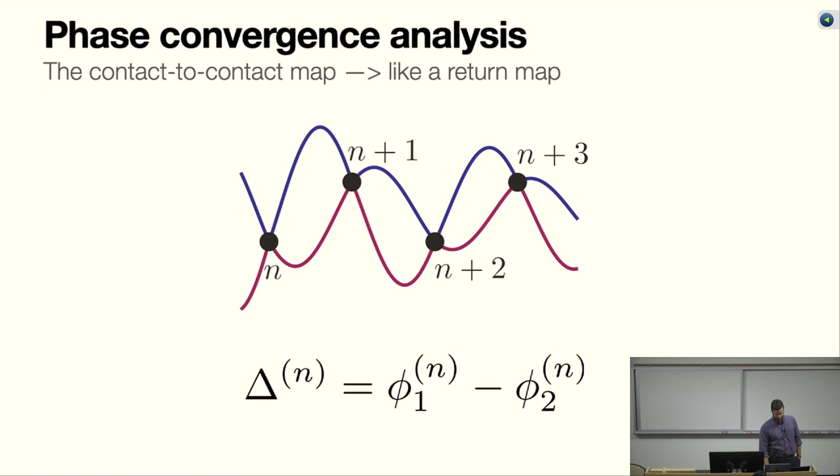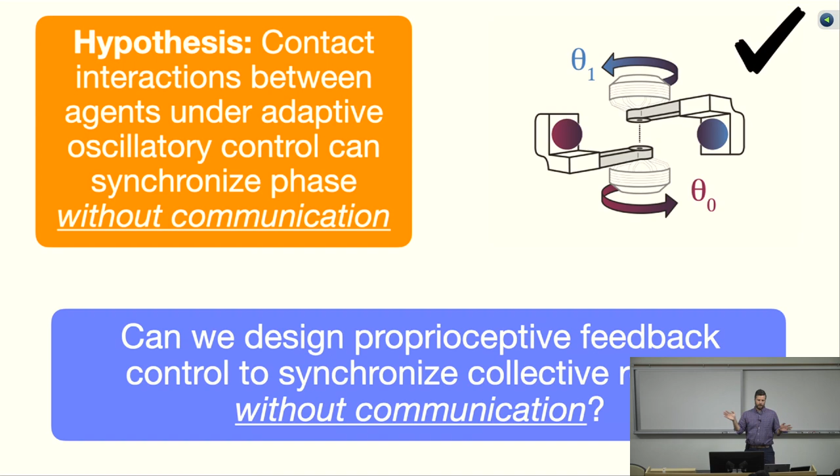All that's really cool - this was a very academic study, but the question is, when the rubber meets the road, how does this apply to robotics? So I challenged my student: can we actually take these ideas of limit cycle actuation and contact and put them into robots to make robots that'll synchronize their gaits?

A robot in this case was the simplest worm we could imagine, a three-link robot with two joints. We actuated it as a phase oscillator, meaning it's got some natural frequency that it wants to follow. It's only responding to disturbances to its own joint motion. There are no contact sensors on this robot - they're just responding to their own local changes in joint angle.

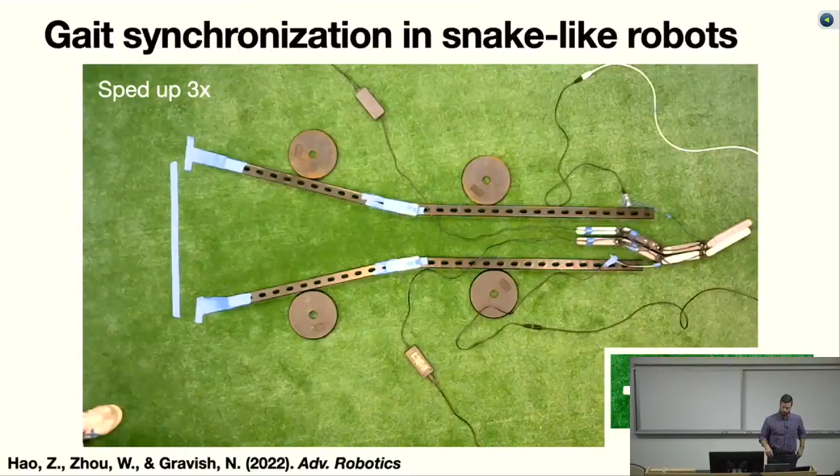We decided to try the worm experiment, where these are robots that have little angled, snakeskin-like features on their bottom. They're not talking to each other through electrical communication - they're just watching their own oscillatory phase and responding to that phase based on collisions with the environment or with themselves. They synchronize their gaits all through contact, all through driving these systems through these very low-level adaptive limit cycle processes.

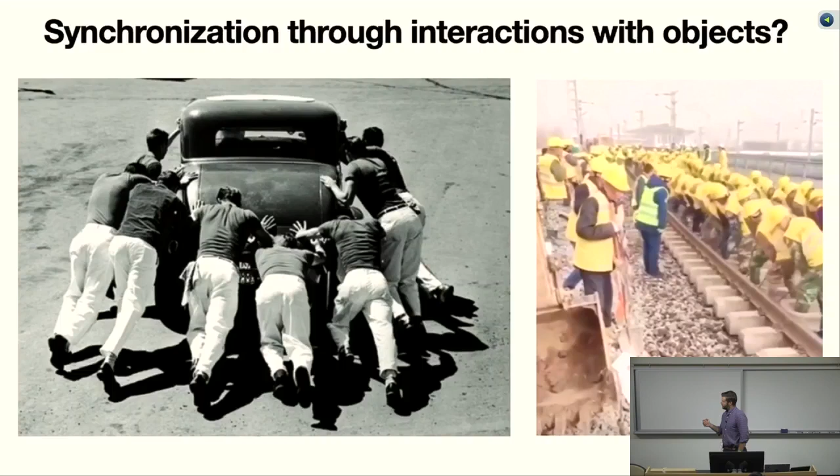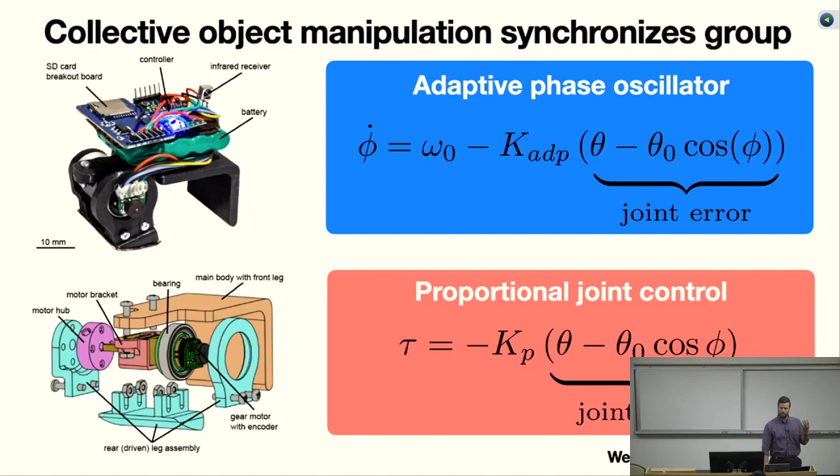The last example I wanted to demonstrate - or that my student wanted to demonstrate - is the following: can we make groups of robots team up together and synchronize their gaits to push heavy objects? So we did the same process of putting in adaptive controllers that will change the phase and slow down the oscillatory phase based off of interactions with the environment. If I push against something, I slow down a little bit.

An example of this: if I take two of these robots that walk through this kind of limit cycle type walk, when there's no coupling between them, no object between them, they walk with a phase difference that never changes. But if I put an object in front of them, very quickly they're going to synchronize their pushing gait. Again, this all happens emergently through the kind of dynamics we set up in the controller for the robot and the dynamics of contact.

You can do this in simulation with hundreds of robots and show the same thing - by being slowed down when I'm pushing an object, my neighbor can catch up to me because it hasn't hit the object yet. That's the basic process. You can design the principles of feedback for these so that you can make these robots synchronize their gaits really, really well and quickly. By synchronizing their gaits, they can push objects further distances, push heavier objects, and it all happens through just this contact interaction through an object rather than any kind of electrical communication.

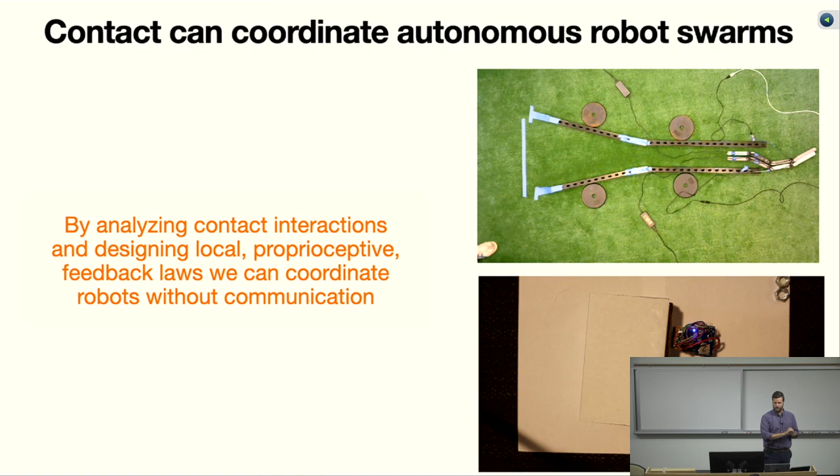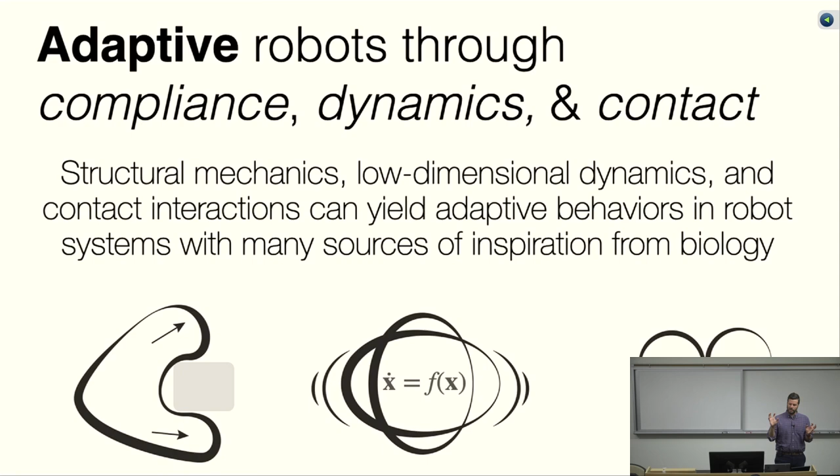This potpourri of topics and this whirlwind of a talk should, I hope, convince you that adaptivity in robots is a very interesting topic, one in which you can get there through compliant structures and soft bodies that interact inherently with unknown environments and unknown objects through dynamical principles like limit cycles and the adaptive properties of these dynamical systems. Contact interactions are really, really interesting, and they can be used in a convenient way to coordinate the behaviors of robots.

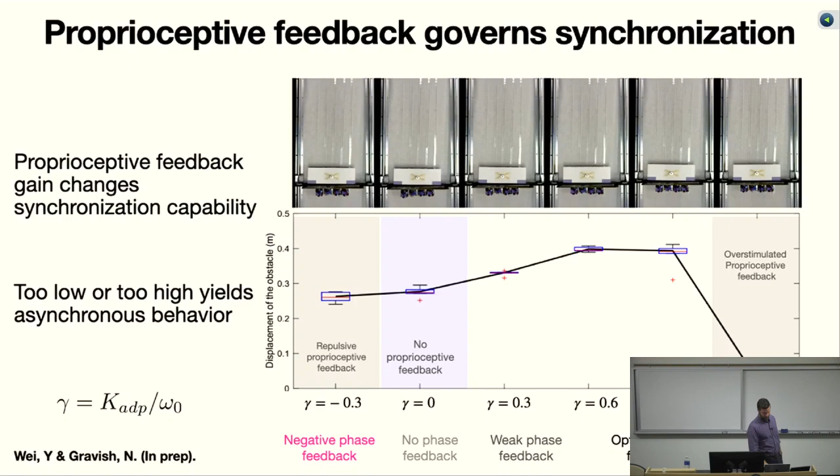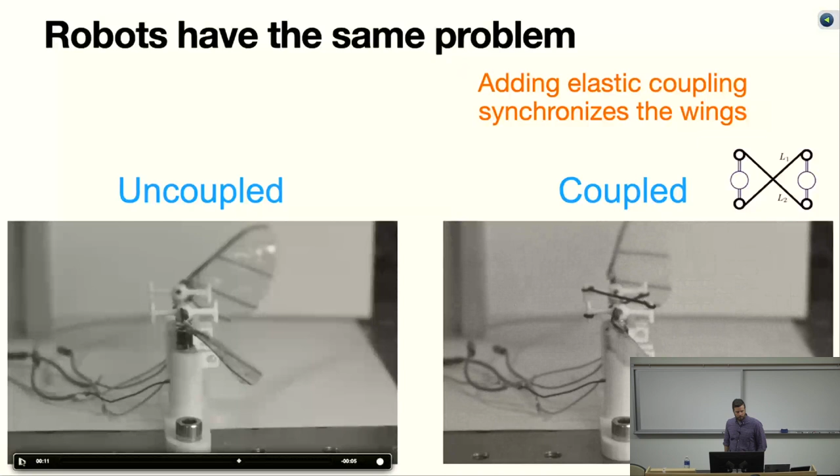Any other questions? So going back to the insect wing beat project, I'm very interested in this really simple elastic girdle that you use. From what I understand from discussing arthropods recently with our expert, when you're talking about an actual flying insect, there would be some elastic response based on the flexing of the exoskeleton that might be happening here. I'm not sure exactly what part of the system this particular response was based on, but is that part of this synchronization?

A very high level analog. The structure, I don't actually know exactly what it looks like. It's called the scutellum, it's basically like a base plate at the bottom of the exoskeleton under the body, but it provides this linkage between the left and right side. The muscles are actuating the whole exoskeleton, not the wing joints, it's called indirect actuation. So the whole exoskeleton is squishing, but there's this critical junction between the two sides that, if you remove it, they desynchronize. This X-shaped structure isn't meant to be a literal depiction of the shape, but the idea is that it's this mechanical coupling between left and right that provides the synchronization. I don't know if I answered the question.

Yeah, just in a very general sense, I suppose, because I was thinking also about curvature based on your prior work, and that there's a great connection in this talk to have a good through line of curvature. I did not think of that, and to be fair, that work from the biology folks is from other great researchers in insect flight, so I just watched their videos and got inspiration from it.

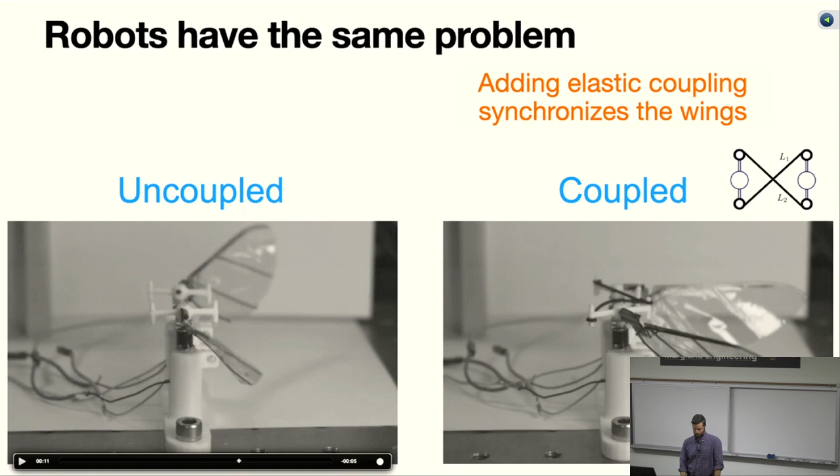So I think the last two were interesting presentations because essentially what I'm gathering is that you're saying that insects remove expensive perception and planning out of the loop from the brain, right? And so the body just has mechanisms to automatically deal with these.

I wouldn't even, I don't know if it's so much about expensive mechanisms for sensing, but they have inherently very fast processes just through the muscle.

Because a signal from a sensory neuron going through the brain back to motor can take a fair amount of time. People who study flies have shown that the responsiveness from detecting a change in the environment, like a fly flying in a virtual arena where the arena moves a little bit, that visual stimulus to change in wing beat control is like 80 milliseconds. That's a long time compared to an individual wing beat, which is happening at like 5 milliseconds or so. So I think this provides a very quick response.

Much like we have reflex responses that don't go all the way up to our brain. They're maybe living in our spinal cord, or maybe even at a very local level. Very quick responses, and I think this is just an example of that. A mosquito flaps its wings at 800 to 1,000 hertz. That's very, very fast. So having the flexibility within the muscle to respond to perturbations quickly is, I think, advantageous.

So the second part of the question is more so: I think this implies there is some kind of reliable actuation in insects, and to some extent with the systems that you've built. But robots are unreliable, right? Motors are unreliable. So my question is, how do insects deal with unreliable actuation or these hard-coded mechanisms, and how do you see that being applied to your physical systems?